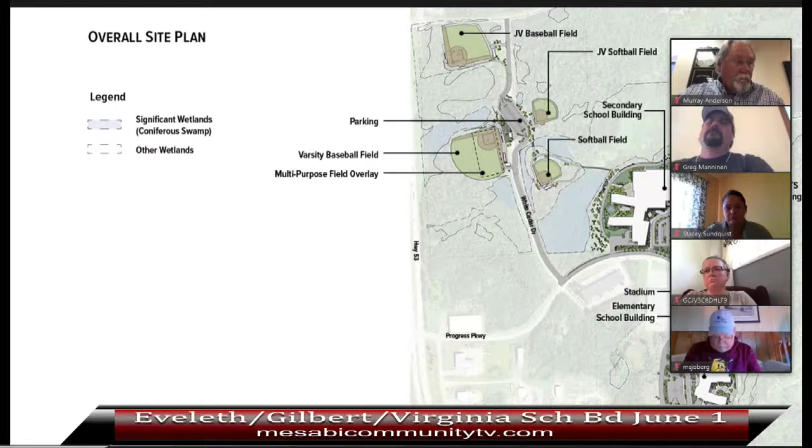Over to Kristen, who's going to talk us through some of the planning of the elementary.

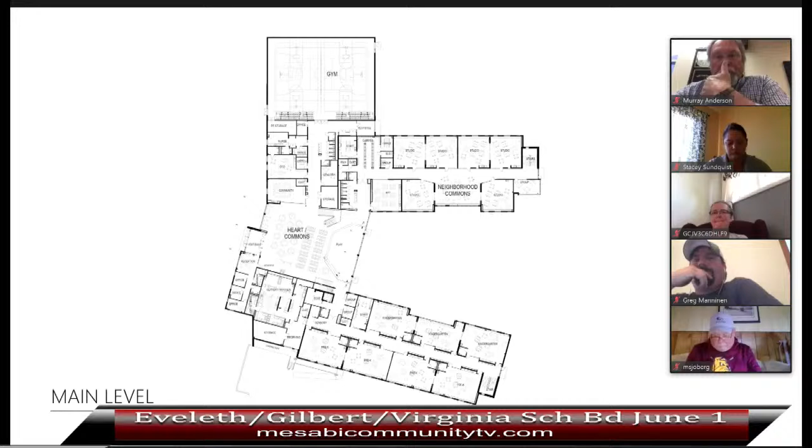Those grade levels above kindergarten each have a neighborhood commons, which you can see labeled there. It hosts media, and some furniture that's mobile, allowing for flexibility throughout the day and different types of learning, with access to those media opportunities there.

Then upstairs on level 2, again we have a repeat of the learning wings, and much of the space in the center is open to the heart below - we're going to see how that indoor playground really connects the two. There's also a technology space and a music classroom up here.

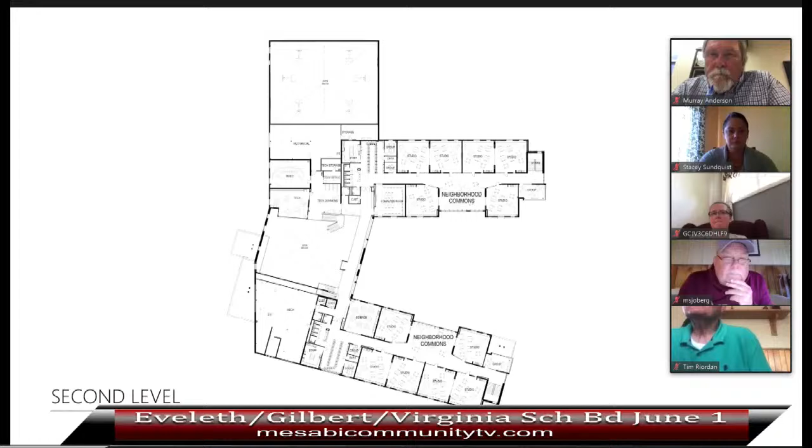So that's the broad overview of how the elementary school is laid out, and we've got some images to share with you too.

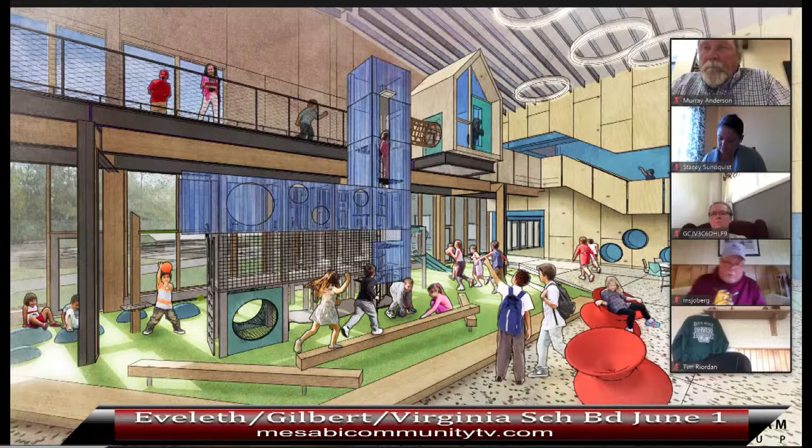This entry then, as Kristen talked about, leads to the heart of the school, and the heart of the school becomes this main welcoming space that has a playful attitude to it, just right for an elementary. The building is supported by a lot of wood to create that warmth, and a lot of area to allow for active play within the school.

We're looking at this play structure that connects the main floor to the upper level bridge, which connects the two learning neighborhoods. There's always this idea, particularly at the common spaces, the heart spaces of both schools, of having connection to the landscape. So you see from entry, through the building to the commons, and from the commons through to the learning landscape, a courtyard space in between the neighborhoods beyond to the east.

And Scott, I know we've got a couple more images. I just wanted to add, on the indoor playground piece, we're really hopeful that it is part of the bid construction, or built as part of the construction package. We're hopeful that bids come in favorably to allow for that to happen. There's a chance it could be a great fundraising opportunity, so we'll know more about that soon.

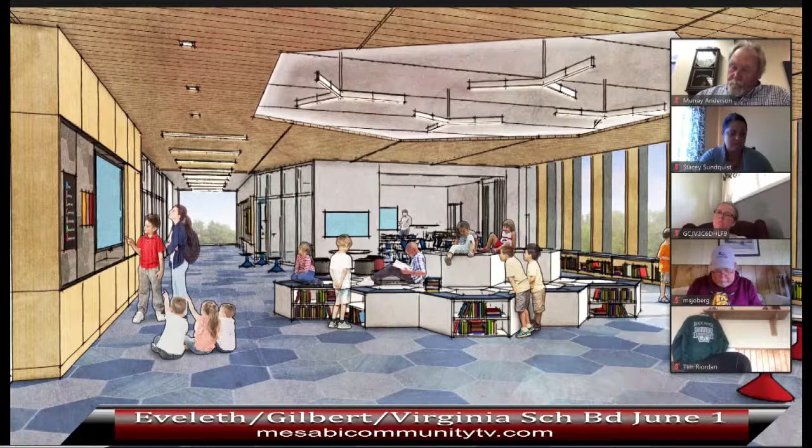So that's sort of the extent of the elementary school. Would you like me to pause now for any questions or comments, or should we move right to the secondary school? Do any of the board members have any questions or comments?

I think you're safe to move on to the second part of your presentation.

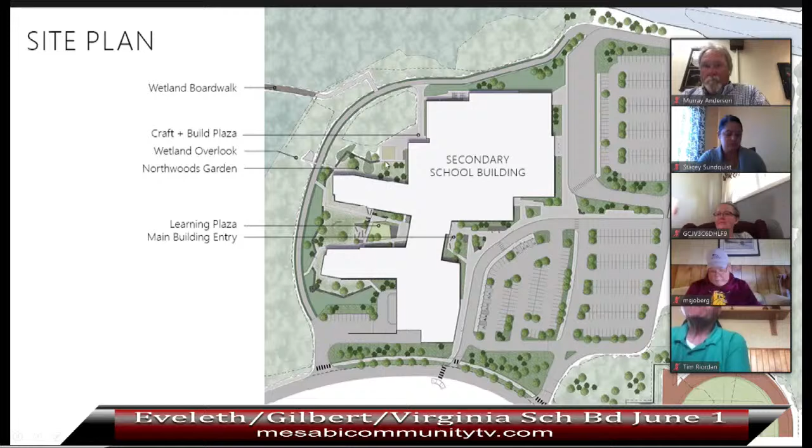And then the third major outdoor landscape element that we want to pay attention to is what we call the Craft + Build Plaza. That's really where works from the arts core as well as the CTE emerge from inside the school. So we have opportunities for some of those components being worked on, whether they're tiny houses or sculpture, to take place and start to emerge and come out of the building on Craft + Build Plaza.

We'll take a high-level tour of the main building, and we've talked through it before, so I think essentially the main components are in the same place. There's just a lot more detail than probably the last time you talked about it or saw this presentation.

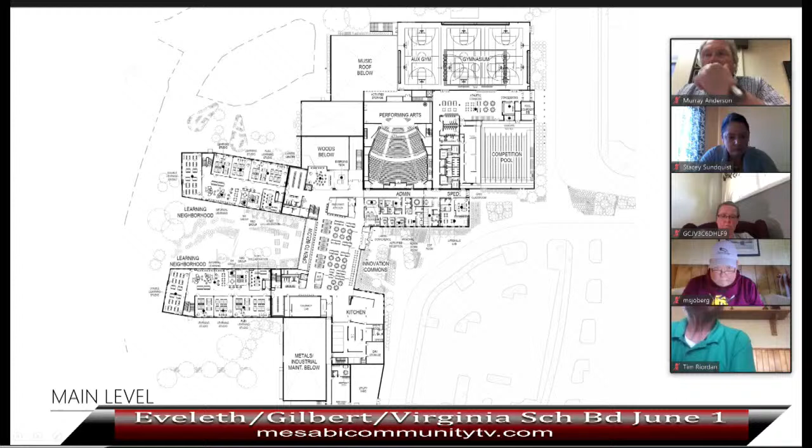Main entry plaza, again, coming from the east, directly into the main entry vestibule. Similar to the elementary, it will connect to what we call the Welcome Center, the welcoming center to the administrative wing. So this is our clear, safe and secure entry point. And everything's surrounded or focused on the main innovation commons, as we call it. It's a 3-story common space.

Just to take a step back, the main level is actually level 2. As I mentioned before, this building steps down with the landscape. So the lower level is level 1, main level is level 2, and then the upper level is level 3.

Main commons supported by a kitchen space to the south. So this is the main servery. They'll support the commons area for lunchtime. As I mentioned, the commons flows through and connects to the outdoor landscape to the west.

Moving west, you have these learning neighborhoods. They're supported by essentially 6 learning studios, small group rooms, medium group rooms, teacher collaboration space, and informal learning space as the key ingredients to each level's learning neighborhood. So you have a south learning neighborhood and a north learning neighborhood.

To the north, we have ProStart Kitchen. South is a culinary lab. And then overlooking the woods, CTE below, is the Career Center.

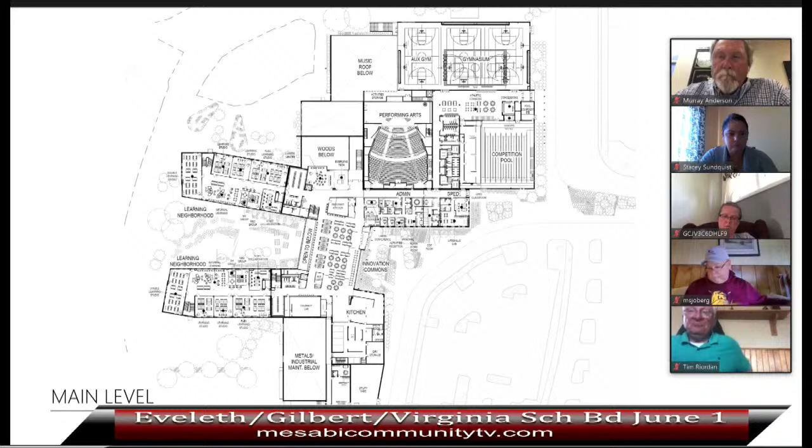And then rounding out the northeast corner of the building is that more public space: the performing arts, the PE and athletic spaces for the competition pool, the support space for the pool, locker rooms, the main athletic commons, and then the main gymnasium here.

So we're going to step down with the landscape, down to the lower level, or level 1, just directly below that previous level I've talked through. Again, we'll start in the middle. We're calling this the creative commons, the 3-story common space. We're calling it creative commons because it's focused and its core is with the arts. So 3D art, 2D art, and digital art are in the core of the creative commons.

Bookending the creative commons to the north are the design lab and construction lab, so this idea about synergy between art and woods becomes an opportunity. To the south, bookending it, is the clean manufacturing lab, connecting art with metal, welding and manufacturing, metals, and then industrial maintenance and automotive. So the core of the lower level is supported by this arts creative commons, and this core is connected out to the landscape, so you can walk directly out to it.

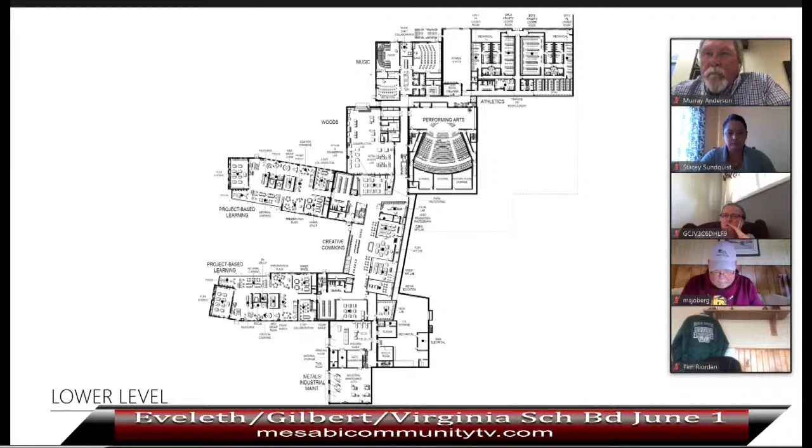I talked through the south, and the construction lab to the north, immediately adjacent to the Performing Arts Center. The Performing Arts Center steps down, so you top load, with the stage at that level. This idea about woods and performing arts allows creating scenes for the performing arts within the construction lab and just moving them directly across the hall to the stage. Directly across the hall to the north is music, again supporting performing arts as its core. Then fitness center, PE, and athletic support spaces—lockers, training rooms, team rooms, and storage—support PE and athletics.

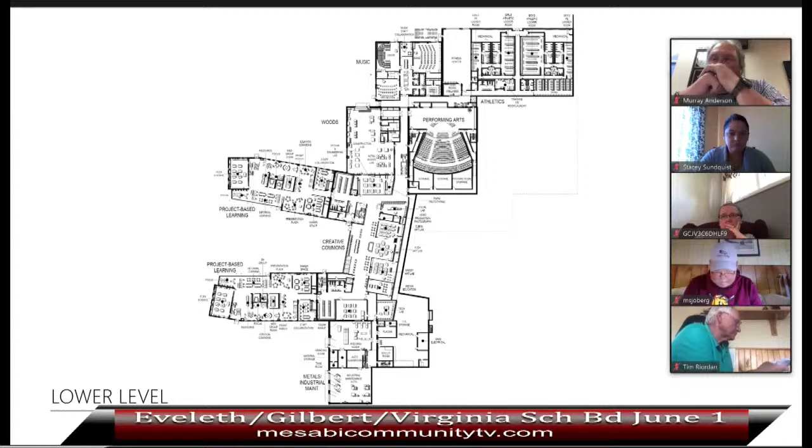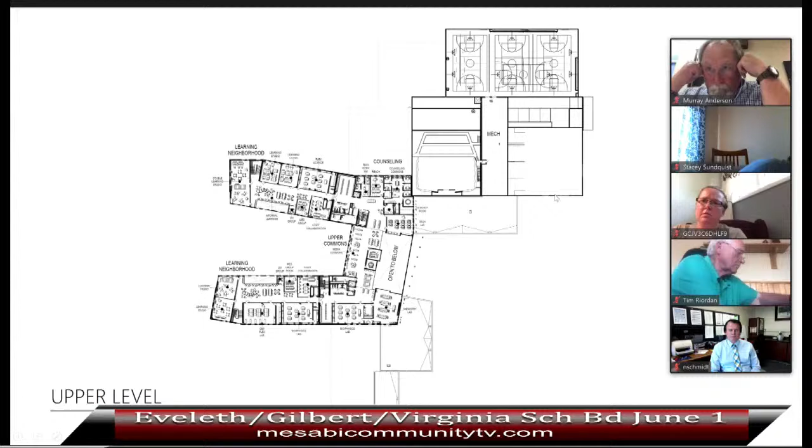We're going to jump two levels to the upper level. Essentially, the third level is the learning core, which includes the upper level media commons area, or research commons, and learning neighborhoods. That's essentially the only third story of this diagram—the rest is just what you're seeing as we slice the plan, showing high volume spaces, but not the floor footprint. So the main third floor, back to the center, has an upper level commons focused on media and research as its core support, as well as presentation and ideation.

To the south, a learning neighborhood that looks very similar to the second floor learning neighborhood, but we're starting to introduce flex lab spaces, as well as a CNA lab that emerged during the programming and design process as something we really wanted to be core to this south learning neighborhood, connected to science. So you have CNA, two biophysics labs, and a chemistry lab as the south learning neighborhood's core learning. The north learning neighborhood is similar to the level below. Bookending the north side of the common spaces is technology, IT support, a tech help desk, as well as student counseling.

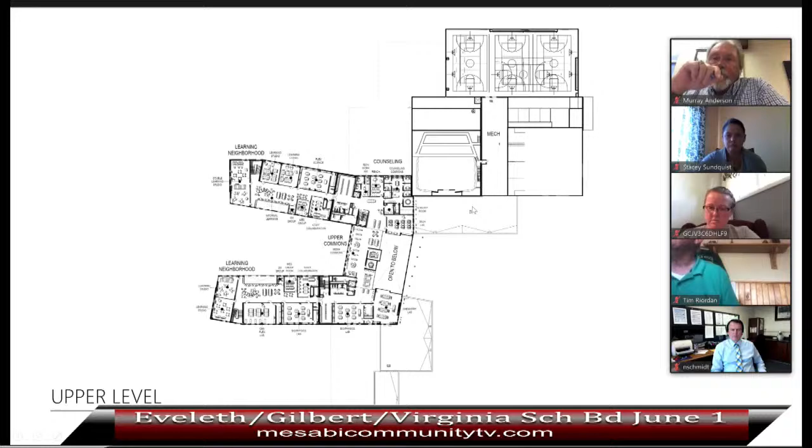So again, a very quick tour, which is essentially the main components. They haven't really changed or moved throughout the building—we've just started to develop all the ingredients needed to support those spaces.

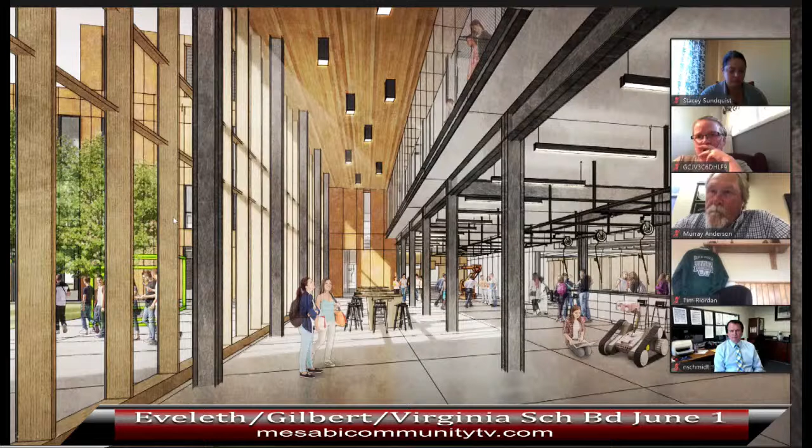Stepping down with the landscape was this idea of the Creative Commons, which has a direct connection to that learning courtyard to the west. You can see from the main level commons a visibility and connection down to that, so as students are working on the main level, they can see down and get excited about how learning is happening outside the footprint of classrooms.

The main Creative Commons is supported by arts at its core, with enclosed art room spaces as well as open art room spaces. This commons area is about letting learning, developing, building, and prototyping emerge from those spaces, not just art but also the CTE to the north and south of this view. Again, bringing daylight into the space becomes really important and fully embraced.